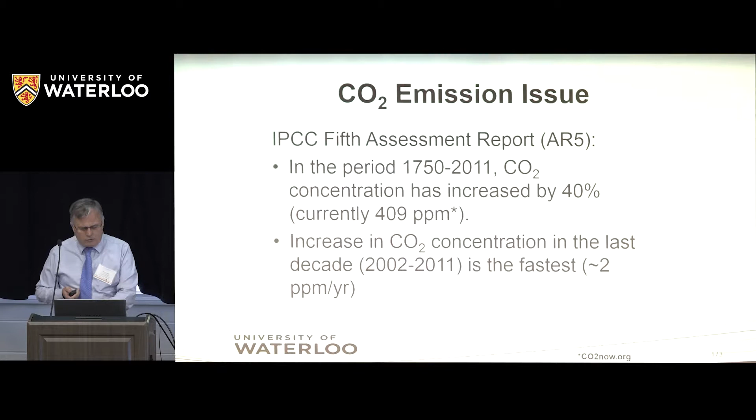I'm going to skip the intro. We know about CO2 emissions, more than some people maybe south of the border. And I want to go directly to the mitigation options.

There are a bunch of possible mitigation options, from energy conservation, fossil fuel switching—Ontario is a case in point, replacing coal with natural gas to reduce the carbon intensity of the fuel—renewables, nuclear, forest sinks. But what I want to focus on is carbon capture and sequestration. You mentioned my expertise in sequestration as well, but that's not entirely true—I stick only to carbon capture.

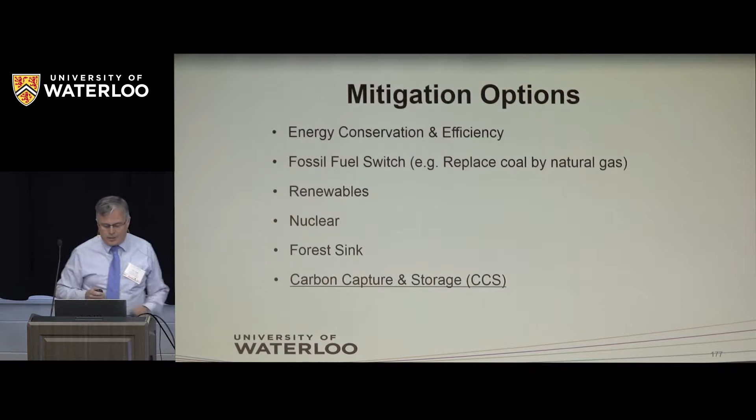So, CO2 comes essentially from burning fuels that contain carbon, usually done to produce energy. There's a big spin on energy in what I'm doing. If you look at the energy infrastructure, it's huge—this is not something we can change overnight. And if you build those plants, they're here to stay for quite some time. So CO2 capture and sequestration can really be viewed as an intermediate measure until we can deploy non-carbon emitting energy sources at a very large scale.

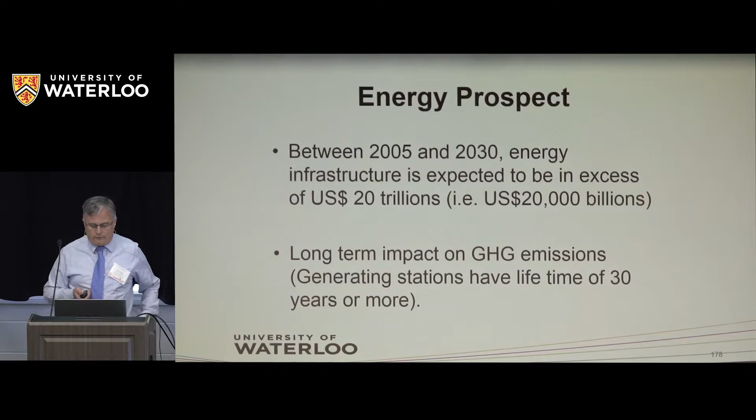If we focus on carbon capture and storage—and I'm going to talk a little about utilization as well—there are three main components. First, you need to capture the CO2 from where it is emitted. Then you need to transport the CO2. And finally, you need to store it. Every one of those areas has specialized people working on it.

If you look at the cost, the capture of CO2 is usually by far the highest cost in this process. So this is where savings could be made, and this is where a lot of research is being done to try to find better ways to capture CO2.

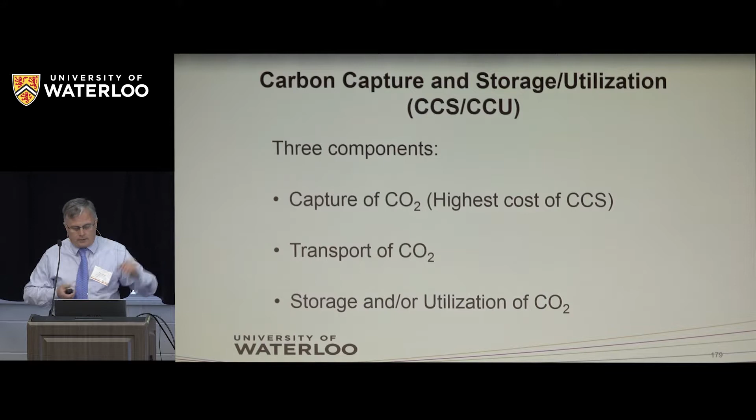Now if we look at utilization—basically using CO2 and making something out of it instead of storing it underground—it's pretty much the same: you have the capture, the transport, which could be significantly shorter, especially if you have a plant nearby, and then a process to use the CO2. What you have to realize is when you burn stuff, the composition of the flue gas can vary significantly depending on the process you use.

So here's an example. If you just focus on CO2 concentration: burning in a natural gas turbine gives only 3 to 4% CO2 in the flue gas. Burning coal, it goes up to 14%. If you use a cement kiln, it can go much higher. So depending on the concentration, you might need different ways to capture CO2. But mostly, the bottom line is these are still fairly low concentrations.

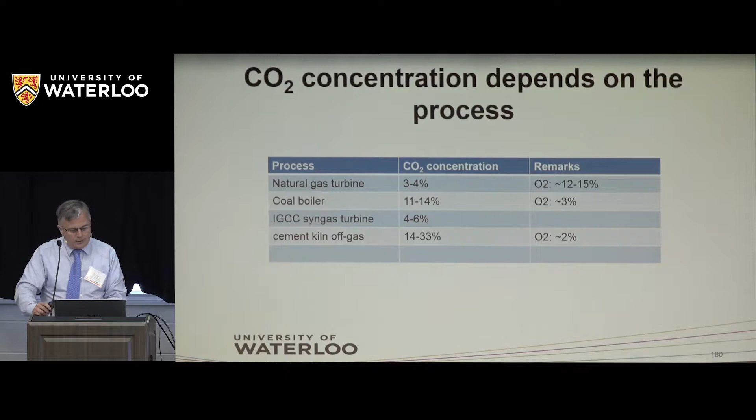So the key here is to deal with how to basically separate a relatively dilute amount of CO2 from a flue gas that may contain a bunch of impurities.

So since we're talking about waste recovery, this could apply if you burn waste as well, not only natural gas, coal, or biomass. There are three main approaches: post-combustion, pre-combustion, and something called oxy-fuel. Post-combustion is probably the simplest to understand.

This is you burn your stuff, you have a flue gas, and you need to separate. So it's a kind of end-of-pipe solution. Then you have to compress the CO2 and do something with it or utilize it. But the benefit of post-combustion is that you don't have to touch anything on your existing device that generates power and heat. So you can just add these at the end.

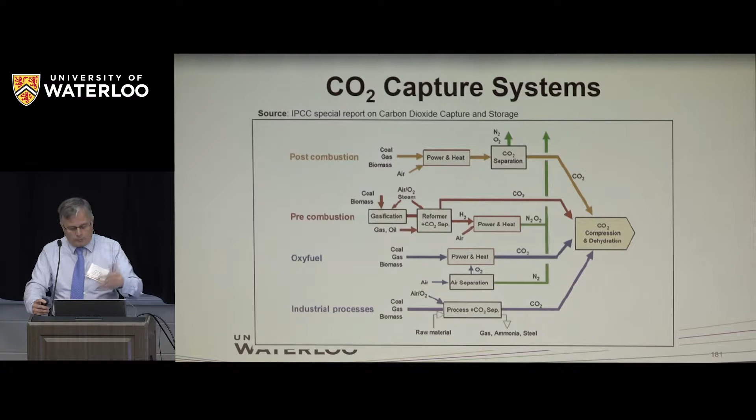Since the main point here is to separate CO2 from nitrogen, people say, why not get rid of the oxygen and nitrogen issue up front? That's basically what's behind oxy-fuel combustion. In this case, you need to separate air: you have an air separation unit where you separate the oxygen from the nitrogen, and you burn your fuel with oxygen. In that case, you get a fairly high purity CO2 at the end. So it looks good in principle, but it's way more complicated than that.

I'm going to go relatively quickly on this. There are several ways to do post-combustion capture. If you take a flue gas, the most common method is a so-called chemical solvent. This is actually a very mature technology that has been commercially available for more than 60 years. It's routinely used in some chemical processes, but not at the scale needed for a big power plant. If you really want to capture CO2 at very large scale, there are very few technologies available at that scale, and this is probably one of the few choices you really have.

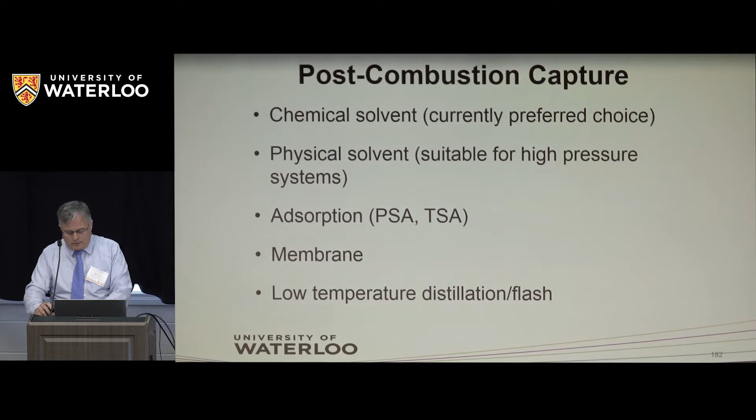With chemical solvents, CO2 reacts chemically with the solvent, so you have a very strong bond. Physical solvents are more suitable for high pressure systems, so in that case the bonding is not as strong, and there are other techniques where you can separate CO2 from nitrogen in the end.

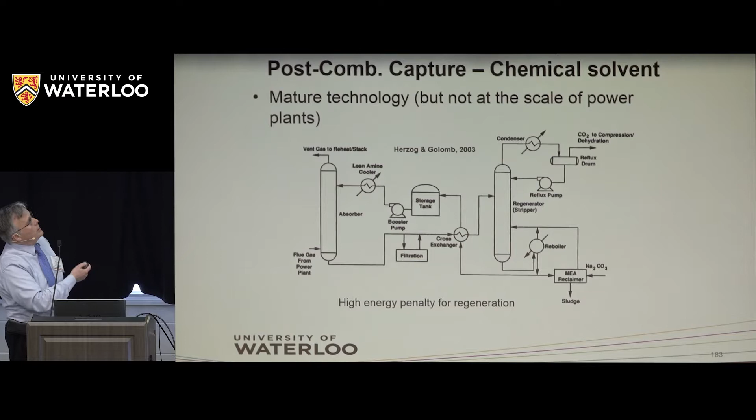Then in the other column, we do the reverse, where we have to re-separate the CO2 from the solvent, and this needs some heat. This is where the process gets very expensive because you need a lot of heat. Most of the cost of a system like that comes from the heat required to regenerate the solvent, which is then sent back to the first column.

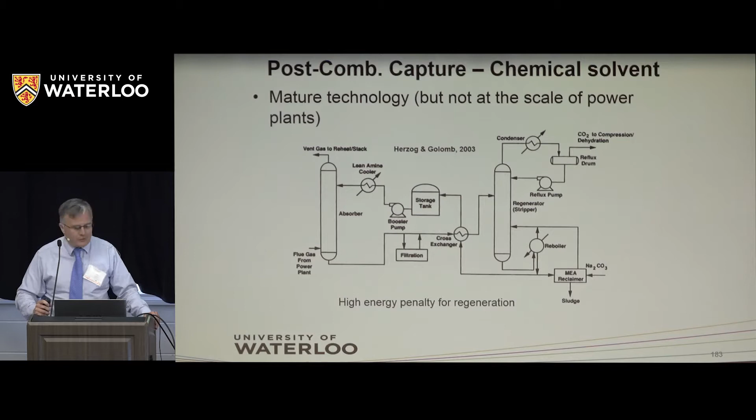So I've heard a lot about circular economy or something like that, so here it's also a lot of cycles as well.

I'm going to skip this.

Oxy-fuel combustion is an interesting process where, as I mentioned, you need to separate the nitrogen up front. You burn with oxygen, but if you burn oxygen with a fuel, it's going to be really hot, and your material won't be able to accept this temperature. So you need to cool down the temperature, and you do that by recycling part of the flue gas, which contains mostly CO2 and water. One benefit is that the flow coming to the CO2 compression and purification is much smaller than in another system.

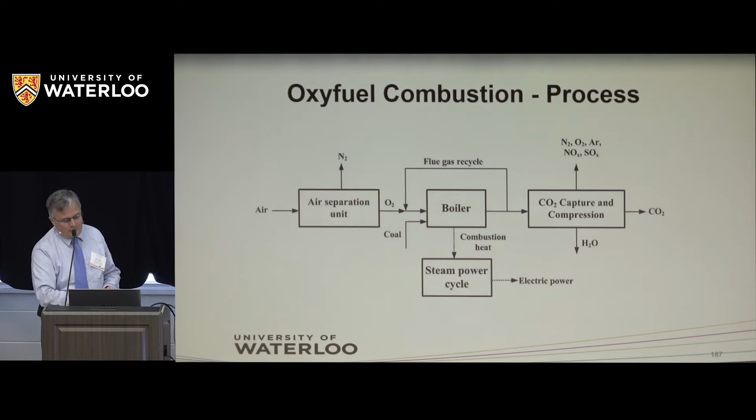So there is a scale, you scale down and can save some energy. But here, the big cost is in the air separation. For a normal maybe 400 megawatt plant, you will need 2 to 3 of the biggest cryogenic-based air separation units you can find. So everything is huge.

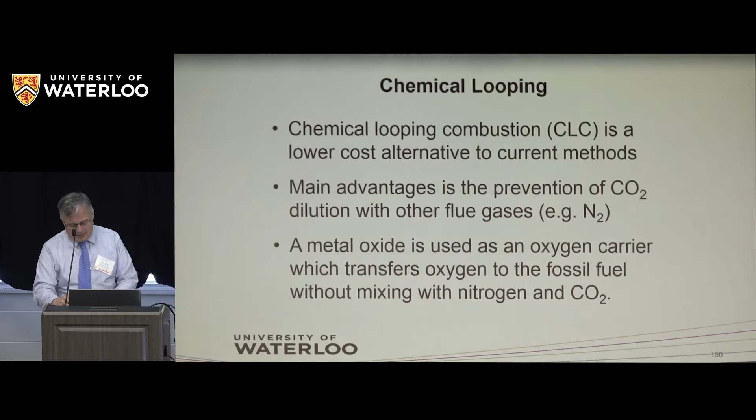Something else that's become more popular over the last couple of decades is so-called chemical looping. You might have heard of this, or you might not. It's a system where you need 2 reactors, another of those cycle things. In one, you have basically a metal - it's kind of a sponge, but a sponge for oxygen. You have a metal coming to react - let's say you have a metal with oxygen, a metal oxide. It goes to a reactor. The oxygen in this metal oxide reacts with the fuel, so the carbon in the fuel becomes CO2, the hydrogen in the fuel becomes water. So you make essentially CO2 and water, which is easy to separate. Then you have to recycle back your reduced metal, which you re-oxidize in another reactor.

So people have done studies, on paper, showing that if you can make this work, it could significantly reduce the cost of CO2 capture for energy production. But a big issue is the metal oxide, which tends to lose a lot of activity over those cycles.

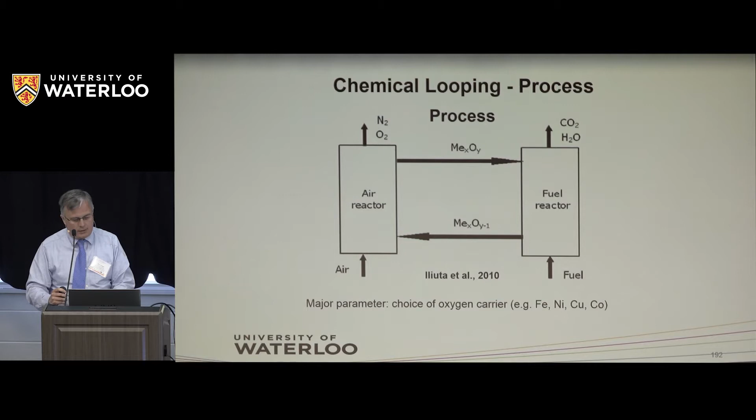I'm going to skip the efficiency discussion - I'm not in economics, but this is the only time I'm going to talk about dollars. When we try to compare systems for CO2 capture based on economics, there's a concept of dollar cost of CO2 avoided rather than cost of CO2 capture. It's a little easier to make comparisons, and that's how it works.

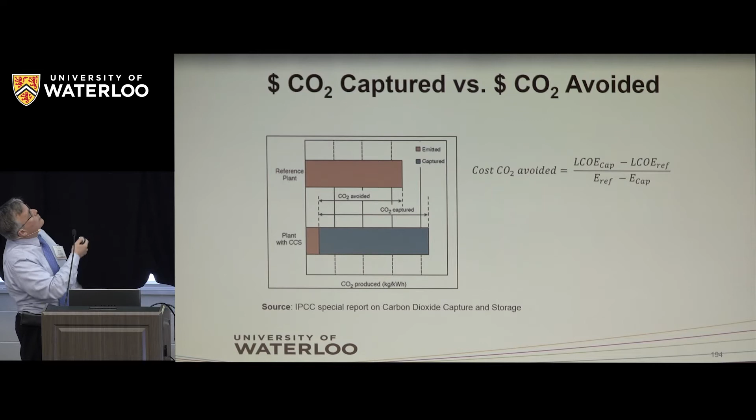So the CO2 avoided is really the difference between the CO2 that's actually being emitted to the atmosphere. And the cost of CO2 avoided is basically the difference in cost of electricity between these two divided by the difference in emissions. So it's a little different.

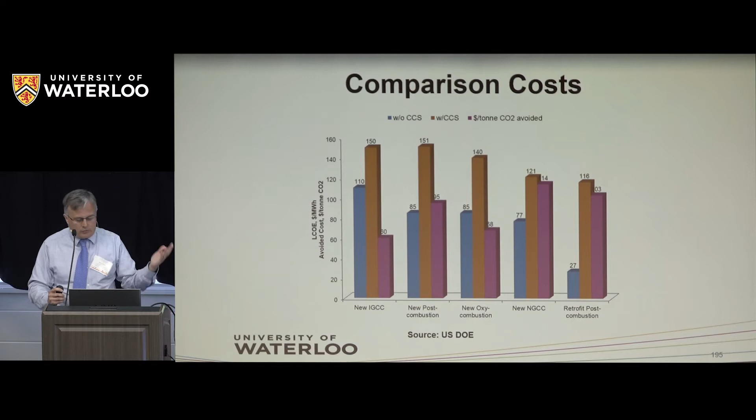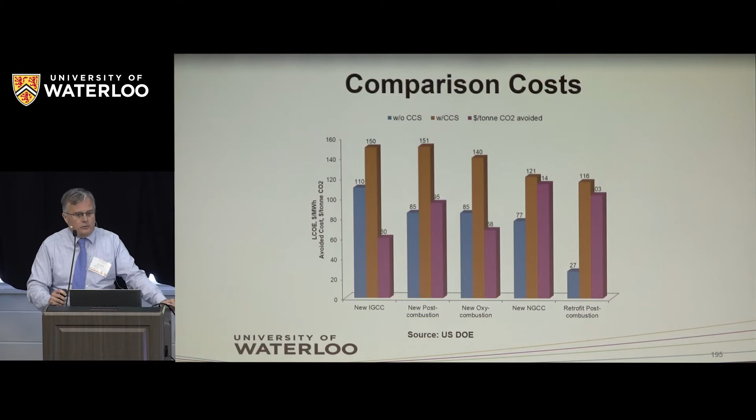If you do that and compare different technologies, it looks like there may be some winners and losers. But depending on the source you use, you'll find something different. The key is that you cannot really say one technology is so much superior to another. That's why so many people are working on different areas.

So all of what I talked about now was to capture CO2 from a flue gas of some sort. Something that's kind of interesting, though there are a lot of debates about its feasibility, is to capture CO2 directly from the air. A few companies are working on this - one of the pioneers is Carbon Engineering, a Canadian company, so might as well mention it. They have a system where they can capture CO2. Now you have to see the difference.

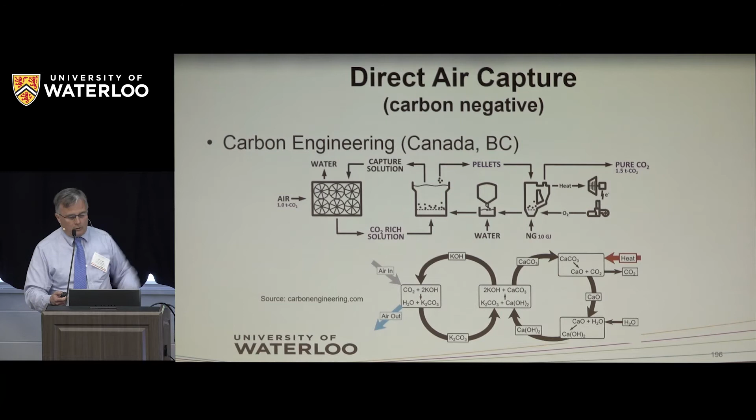Now we have only 400 ppm of CO2 to capture, as opposed to maybe 10%, so it's a huge difference. People are going to argue about the economics of such a process, but if you look long-term, in the event we cannot reach the 2 degree target because we emit more than we think we would, this kind of technology can actually remove CO2 even a long time after. So that's how people can sell this kind of thing.

Now, because this workshop is more about waste, I tried to see where we can link CO2 capture and waste. So you have all these waste-to-energy plants, we heard about that. According to the EPA, the CO2 emissions from those kinds of plants are somewhat similar to a natural gas plant, once you take into account the biomass you can reduce emissions.

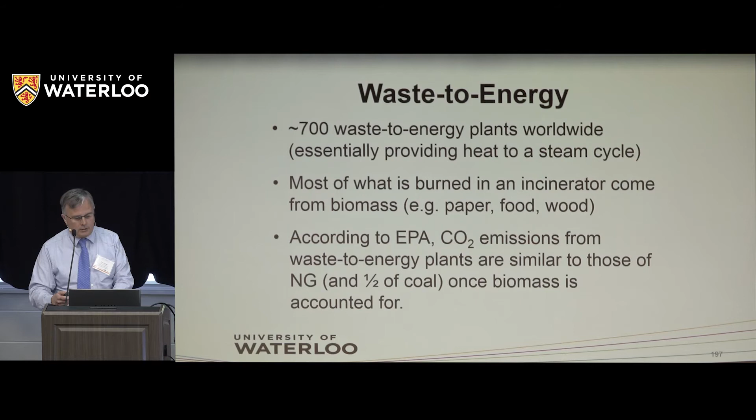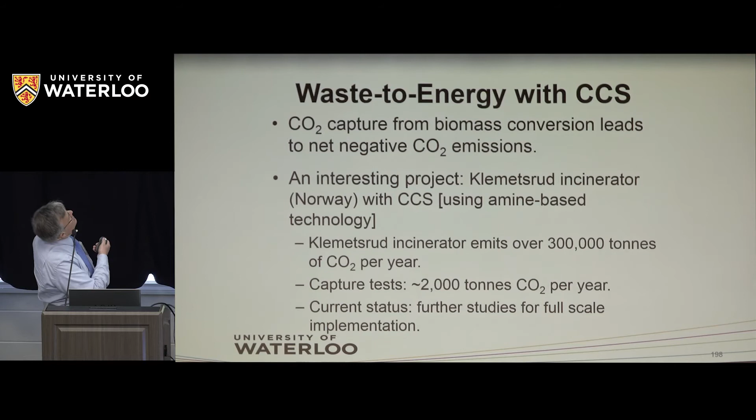But I found one example where people are trying to add a capture system to an incinerator, in Norway, near Oslo. It's not full scale, this was done last year sometime. They have an incinerator that emits over 300,000 tons of CO2 per year, and they ran a pilot test trying to capture 2,000 tons of CO2. Apparently this test has been successful, but they are working on further study to see if they can go to full scale. Obviously, cost is a major issue here.

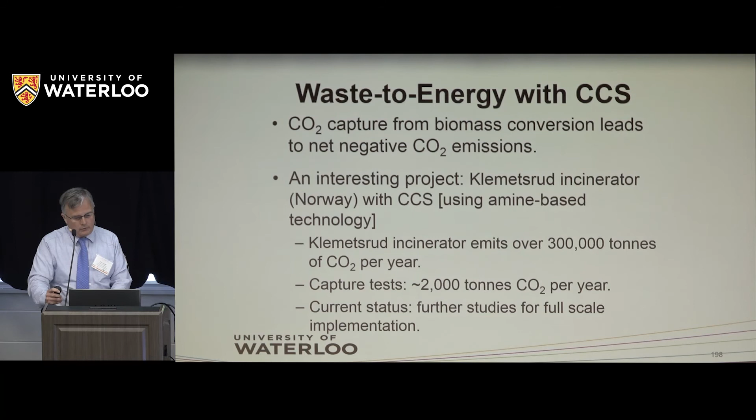Now, one of my last slides is about what you do with this CO2. It's good that you can capture it, but what do you do after? This is where CO2 utilization or storage comes into place. For storage, you have enhanced oil recovery, which is a big one. There are a lot of things here, but you have to realize many may be very interesting from a business aspect, but are too small to make any significant difference. The ones that could make a difference in terms of CO2 utilization, where you need large amounts, will be this one.

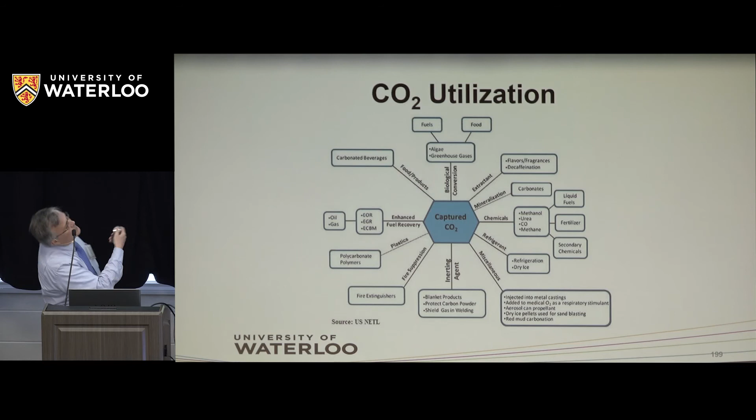You can also produce some chemicals, you can't see it very well from here, but this can be quite big. You can do mineralization, carbonates are also a big one. Also something that's becoming more and more popular, using algae to make biofuel. Those are also very promising.

So I'd like to show you just one example. I have three, but in the interest of time, this is probably the most interesting for an audience like we have here. We are working with a company called Advance Chemical Technology on a process where we try to use CO2 as a feedstock to ultimately produce methanol. Some people have set up this kind of process: you bring in CO2, you have hydrogen coming, usually from an electrolyzer, so it's hydrogen that didn't emit much carbon dioxide. You mix those to make a product, and typically methanol is a good one.

To make methanol, you need hydrogen and carbon monoxide, so you need a source of hydrogen and a source of carbon. Our source of carbon is still primarily natural gas, like a normal methanol plant, but with some CO2, and our source of hydrogen is still a little from natural gas, but also from water. So we have a kind of system here.

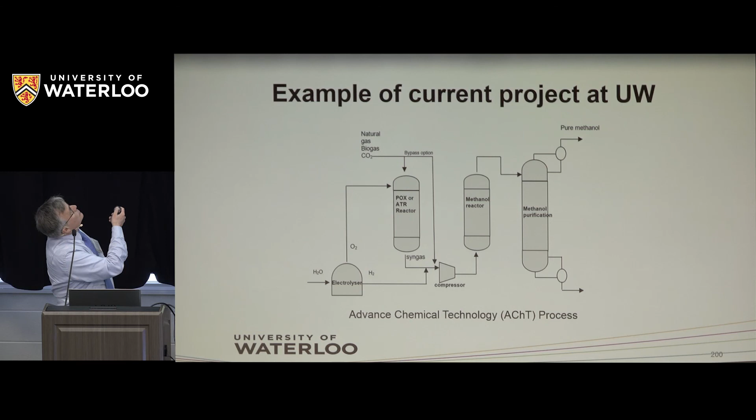This is where the CO2 comes in; we are looking at a possible site with a nearby plant, and we are currently looking at how we can implement the purification of the CO2 as well. This process in itself generates some CO2, so we can capture it to have a plant that is at least zero emission, if you take into account the CO2 capture, or possibly even a little bit negative emission, to make methanol. I'm going to skip the rest, and I want to thank you for your attention.